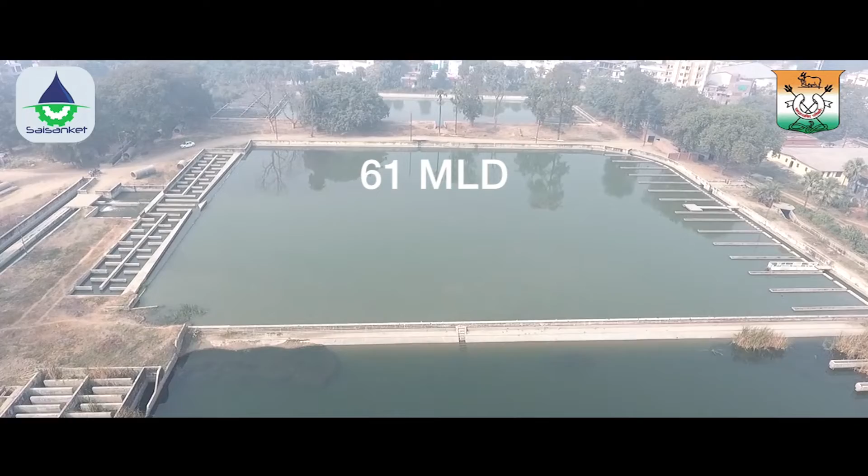The total current population for the Cis-Varuna region is 13 lakhs. With 150 LPCD demand and appropriate allowances for losses, the total demand for water is around 225 MLD for Cis-Varuna region. The total installed capacity at the existing water treatment plant is 311 MLD, comprising 3 different plants of 61 MLD, 100 MLD, and 150 MLD. However, the 61 MLD WTP is completely dysfunctional and the other 2 rarely work at full capacity.

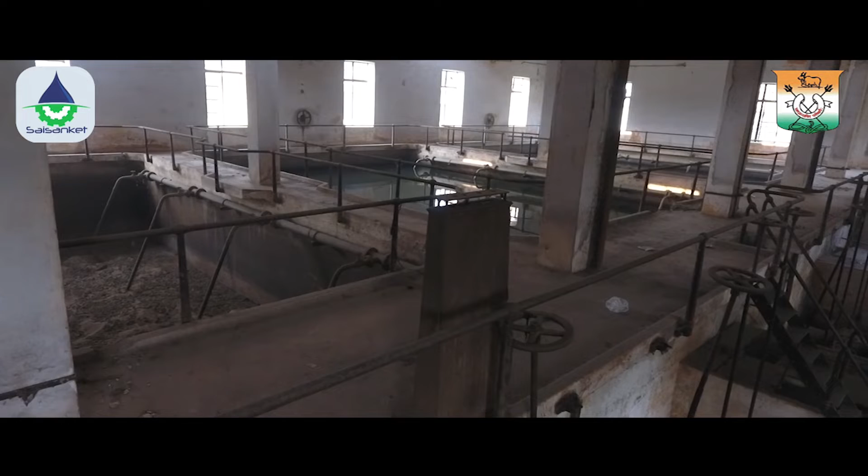Inadequate treated water coupled with loss of water in distribution results in intermittent water supply and associated problems, including poor water quality. Although the Cis-Varuna region water supply system is riddled with many problems common to most water supply systems in India, many components of the water supply system are in good condition and the rest can be rehabilitated to full design capacity at minimal cost. Restoring the water treatment plant and the associated raw water supply system to full design capacity can help boost the consumer supplies to desired levels, simultaneously minimizing serious bad water quality problems.

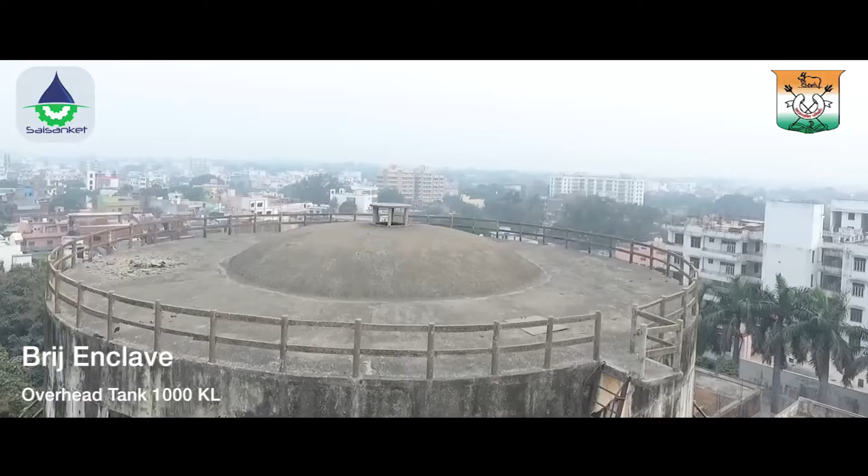Concurrent rehabilitation of clear water pumps and electrical panels, centralized monitoring and control of all pump houses, restoration of bulk treated water feeder mains, and installation of a hydraulic system that automatically regulates flow rates to various ground level and elevated service reservoirs will ensure equitable distribution of potable water to various zones.

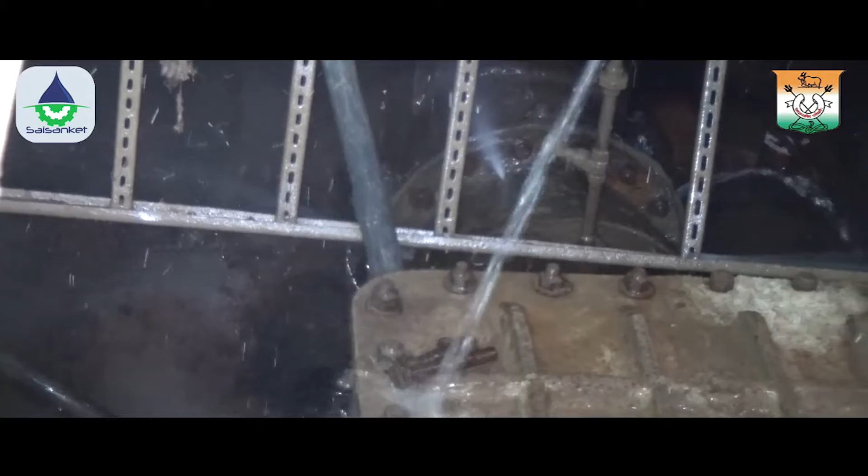The main reasons for the loss of carrying capacity are frequent leakages or burst conditions along the pipeline, breakdown of pumping machinery, and air entrainment from the periodic filling and draining of pipeline. Frequent leakage and burst conditions in turn are due to lack of proper surge protection system, inefficient check valves, also known as non-return valves, and absence of non-slam air valves.

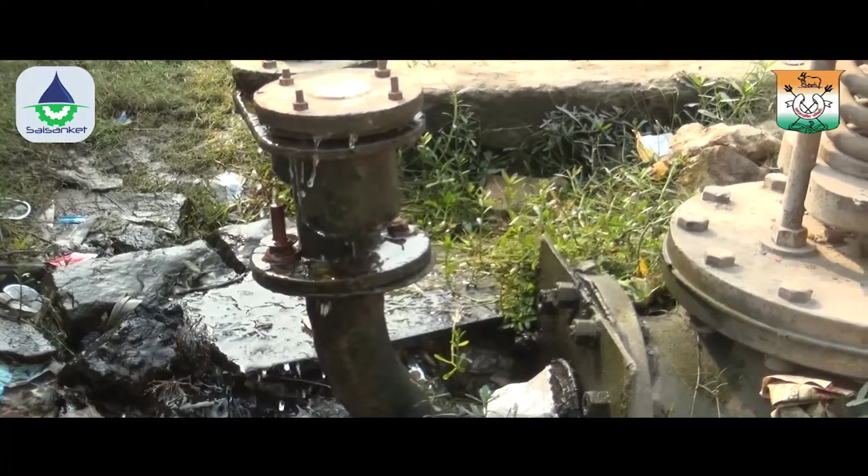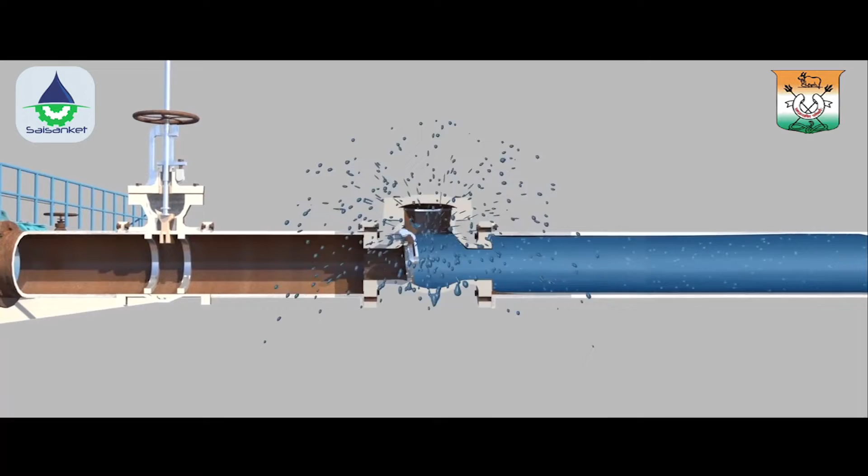Inadequate surge protection system. Every time the pumps trip, the water column slams on the check valves, both at the pump station and along the pipeline. When slam pressures exceed the pipe pressure rating, a leakage may develop or result in burst condition. In addition, repeated occurrence of slam pressures can progressively weaken the pipeline and lead to subsequent burst condition.

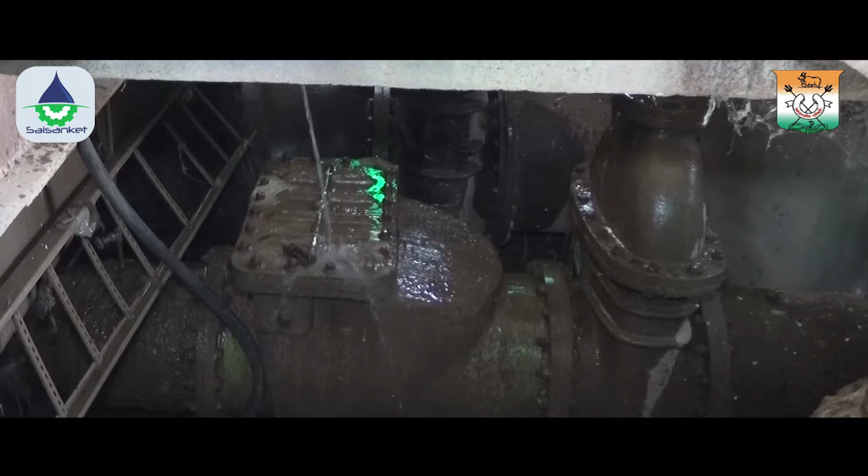Damaged check valves. Conventional check valves get damaged over a period of time due to repeated occurrence of surge pressures. Once check valves stop functioning, there will be heavy backflow through the pumps, resulting in vibration of pumps, loosening of seals and eventual leakage of water within the pump station. The damage can be huge if the operators do not react within 1 or 2 minutes and close the valves.

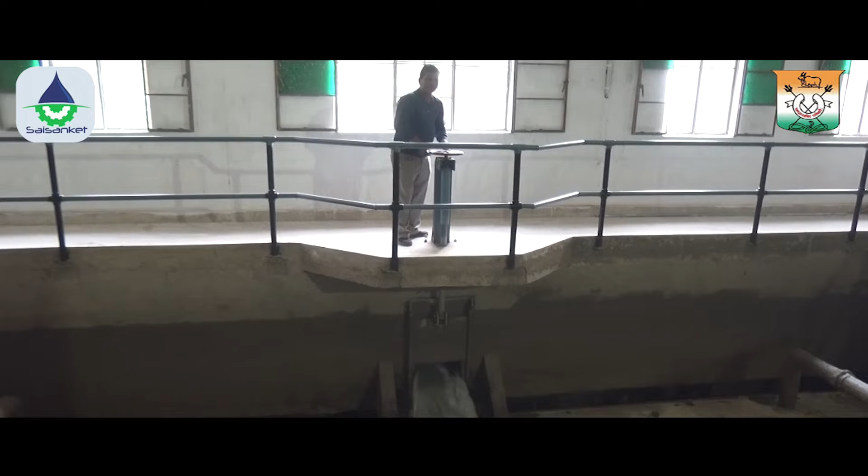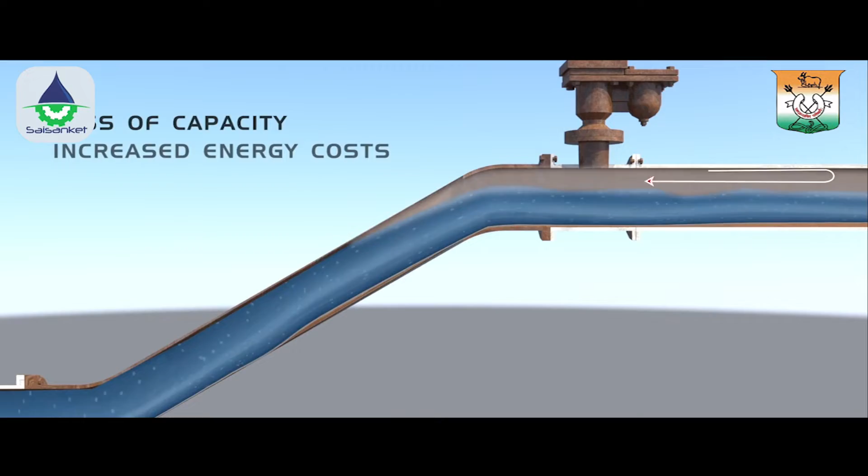Periodic filling and draining of pipelines. Failed check valves and periodic pump trip events result in frequent draining of the pipeline. Ordinary air valves cannot release the air efficiently and air gets entrapped in the pipeline during subsequent pump startup operation, leading to severe loss of capacity. Ordinary air valves will also result in air slam conditions, and resulting high surge pressures can generate leakages or burst events along the pipeline.

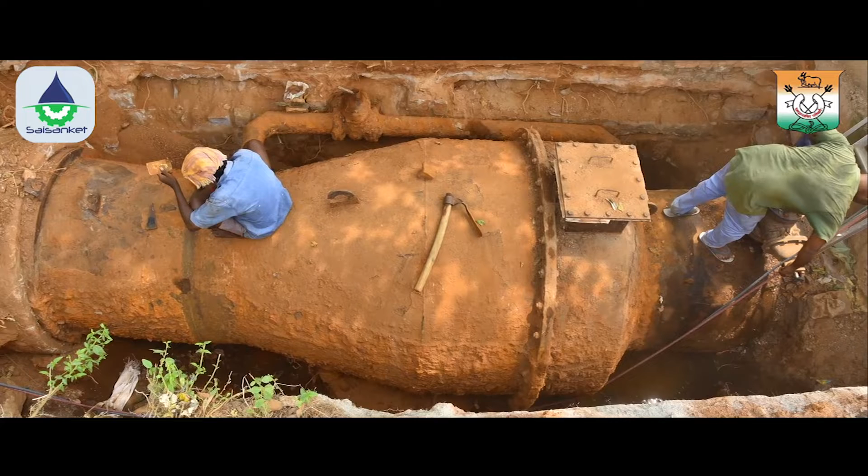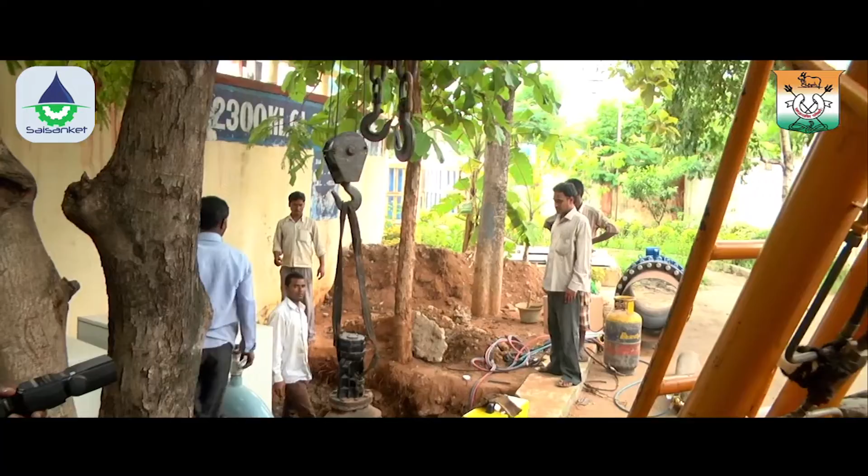Frequent pipe burst conditions. Every time a pipeline bursts or a major leakage is developed, it takes anywhere from 6 hours to 1 day to fix the problem and restart the pumps, causing a disruption in treatment and supply of water too. Pipe repair works call for emptying of almost the entire pipeline, and the draining process takes a long time and is often accompanied by loss of precious water and damages to the nearby crops.

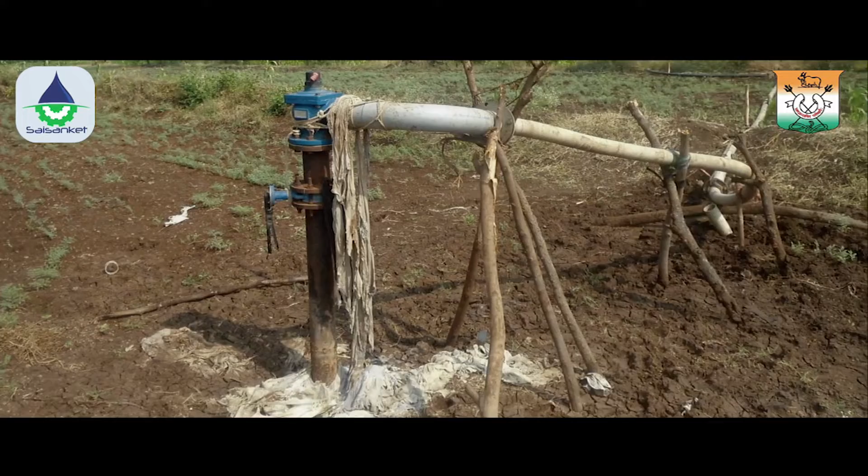Exposed air valves. The conventional air valves are exposed to people who tamper with them and steal water. The air valves may also become non-functional, which will have a negative impact on the hydraulics of the entire scheme.

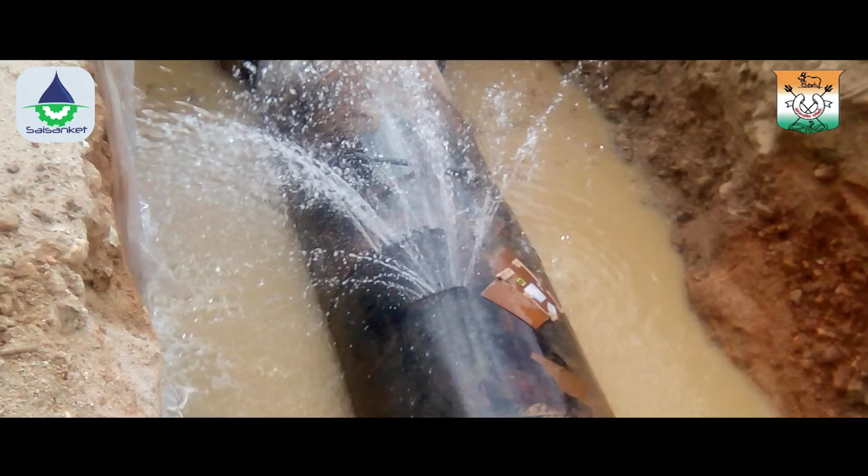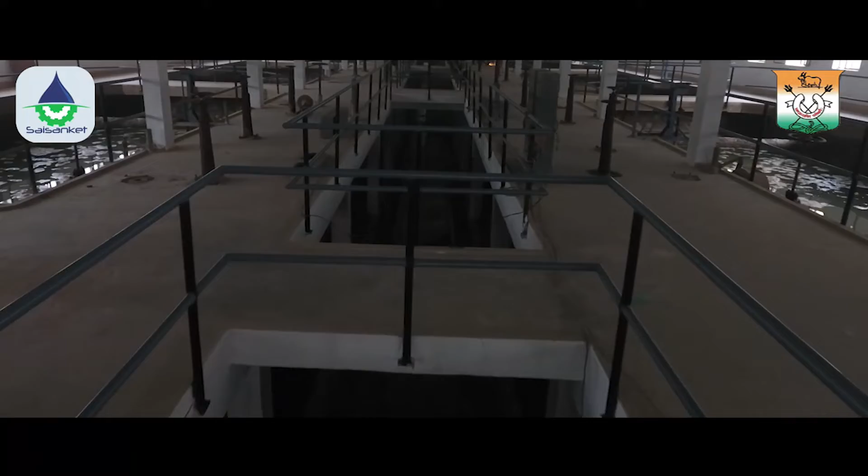These problems are not unique to Varanasi water supply scheme and are faced by almost all water supply systems in India. In addition to rapid deterioration of water supply infrastructure, loss of capacity increases the pump energy costs. For example, a 20% loss of pump and motor efficiency increases the energy costs by more than 2 crores each year for Varanasi Municipal Corporation.

The water treatment plant at Aditya is in very good condition and can treat water at full design capacity once the raw water side of the system is rehabilitated. Treated water is then distributed to various ground-level and elevated service reservoirs within the corporation limits and from there to individual consumers.

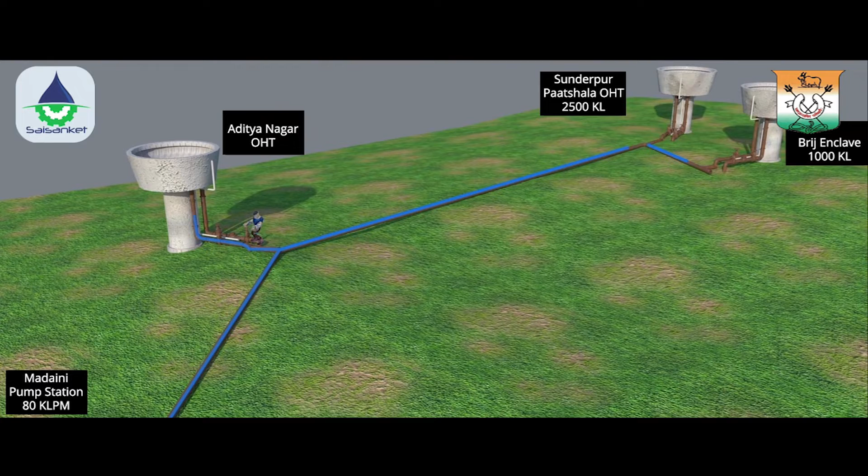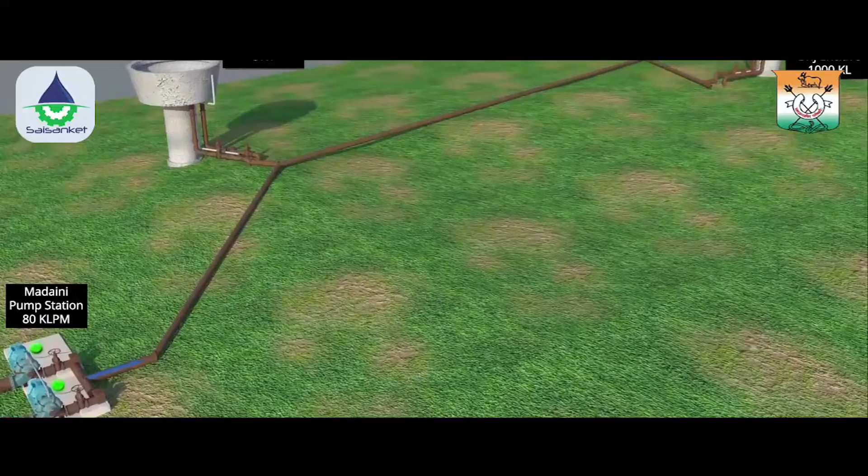There are problems associated with distribution of treated water as well. In the stage of bulk distribution of treated water, achieving equitable distribution of bulk treated water to ground and elevated service reservoirs is almost impossible, and the traditional method of manual throttling is a very tedious process. No matter how well a system is designed, the inevitable variation in residual heads will distort flow of water into each reservoir, which results in inequity.

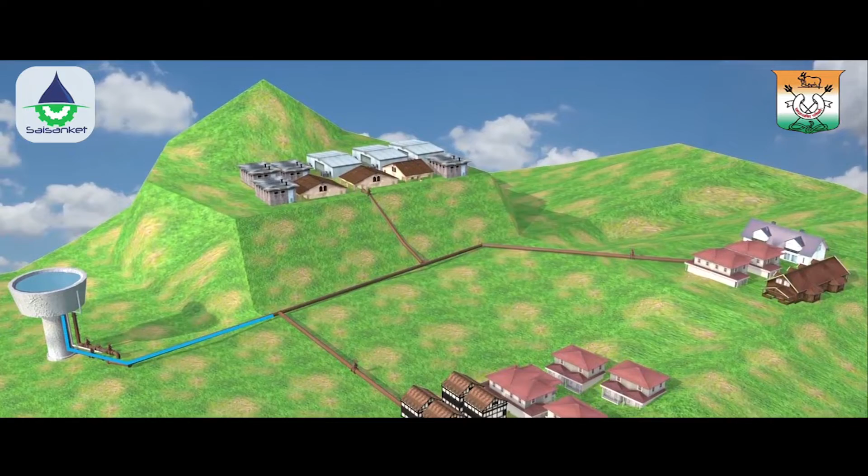In the stage of supplying water to households, once again, inequity will set in, as flow of water to various households is dictated by gravity and hydraulics. The supply process is done manually, which is also a reason for unequal distribution.

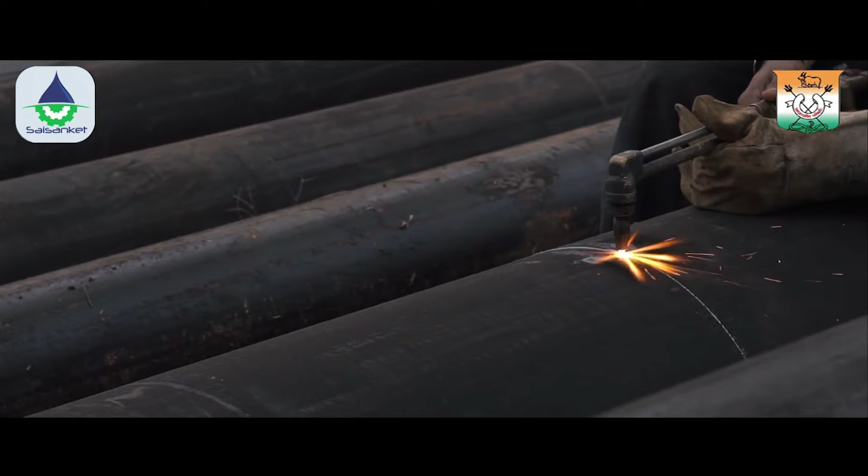Manual operation. The entire scheme is operated and managed manually by untrained manpower and hence mismanaged, leading to many failures of pumps and pipeline. Every failure leads to considerable downtime for repairs and maintenance, resulting in disruption of daily water supply and recurring unexpected and unwanted expenses.

Though the pumping machinery, surge protection system and some segments of pipelines are in badly deteriorated condition, the overall water supply infrastructure is still very valuable and should not be abandoned. Instead, a good rehabilitation program can unlock the value of existing infrastructure and strengthen the water supply scheme to original design capacity at a fraction of the cost of building a new water supply scheme.

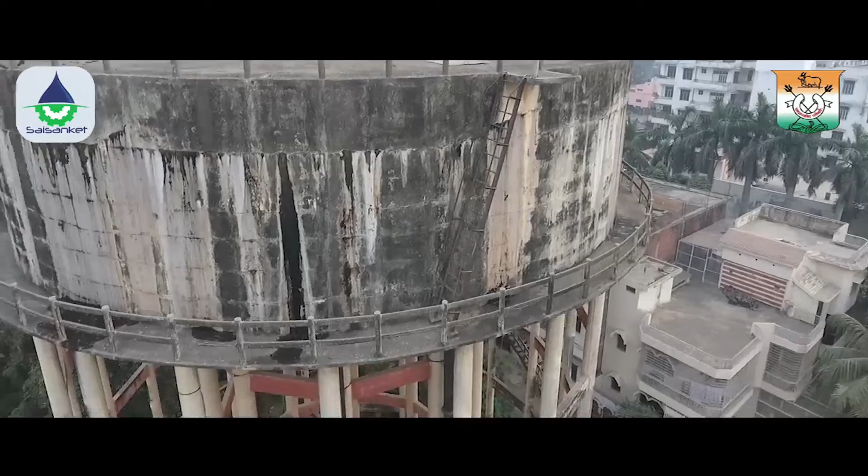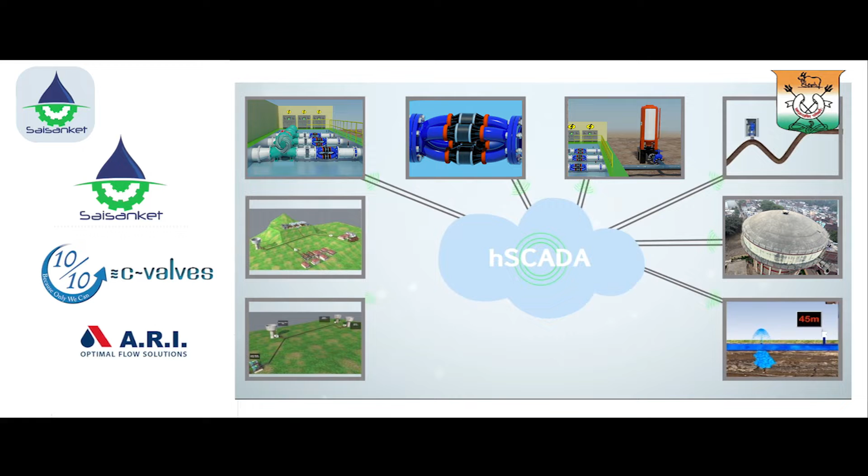Varanasi Municipal Corporation and the Public Health Department have taken up the task of complete rehabilitation of the existing water supply scheme with an aim to restore full carrying capacity of the raw water system and enable assured and equitable distribution of treated water. The rehabilitation work was also based on the most advanced and time-tested technology from around the world in order to prevent rapid deterioration of various components in the future and minimize operational energy costs. Solutions to the main problems pertaining to the existing system are:

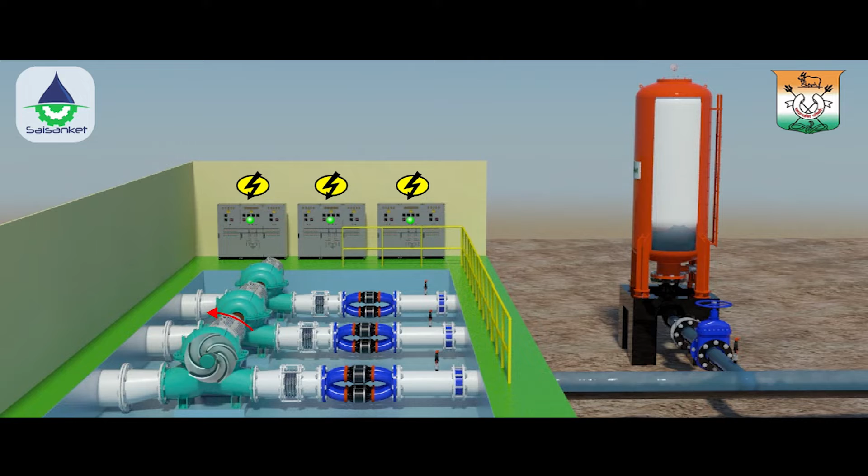Bladder vessels-based surge protection. These maintenance-free devices provide excellent compressed air-based surge protection for pipeline systems. They protect pipelines from both extreme low pressure and extreme high pressure conditions, thereby preventing future leakages and burst conditions as well as enhancing the life of pipelines.

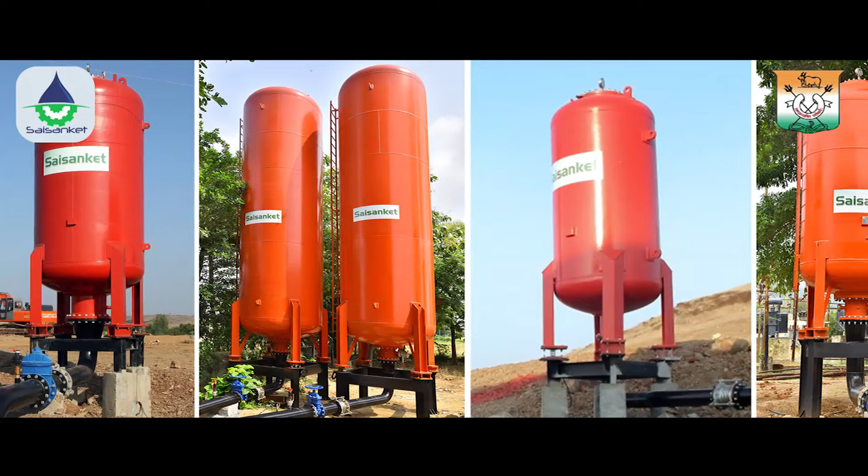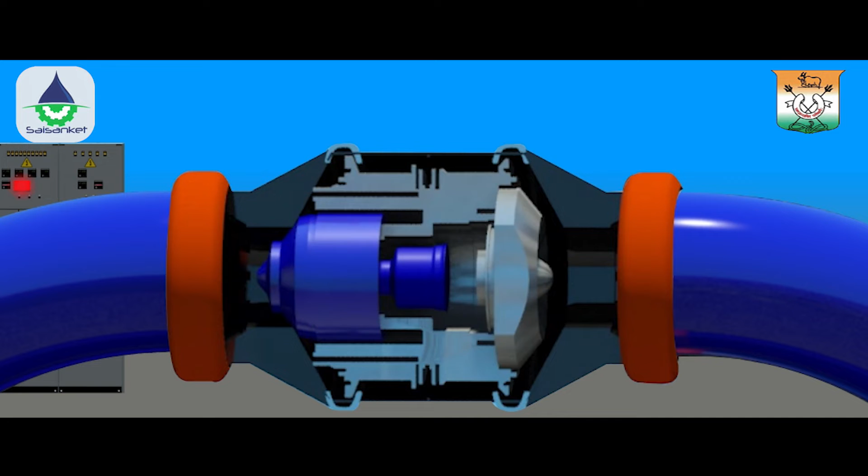Pump control valves in place of check valves. State-of-the-art Israeli pump control valves will replace the check valves to help with smooth starting of pumps and automatic stopping of flow reversal when there is power failure. The sturdy construction of pump control valves makes them fail-safe even under extreme operating conditions and prevents the need for the operators to run and close the isolation valves. Since there is no slam condition, all equipment within the pump station is very well protected and pumps will continue to operate at high efficiencies for a long time.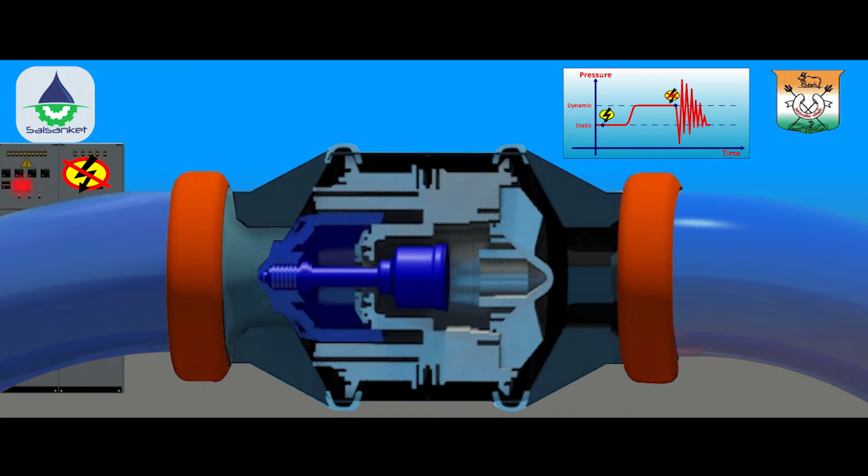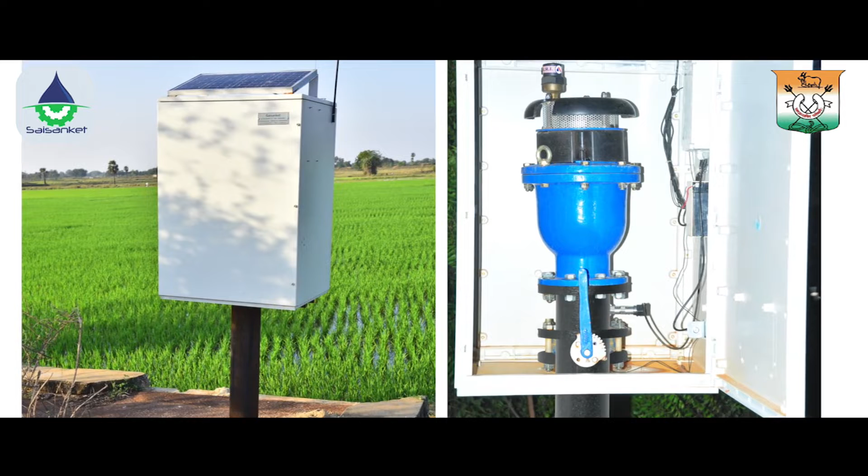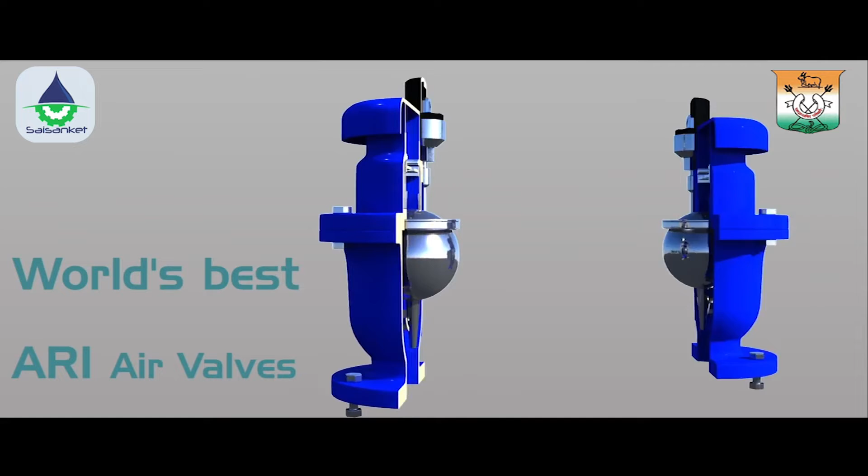Enhancing carrying capacity of the pipeline. Preventing entrapment of air along the pipeline is the key to maintain high carrying capacity of pipeline. The rehabilitation work employs the world's best Israeli air valves from ARI that will provide a fail-safe mechanism of removing residual air. In addition, the rehabilitation work involves continuous monitoring of the health of air valves, so preventive maintenance work can be undertaken in case of necessity and keep the pipeline in healthy condition all the time.

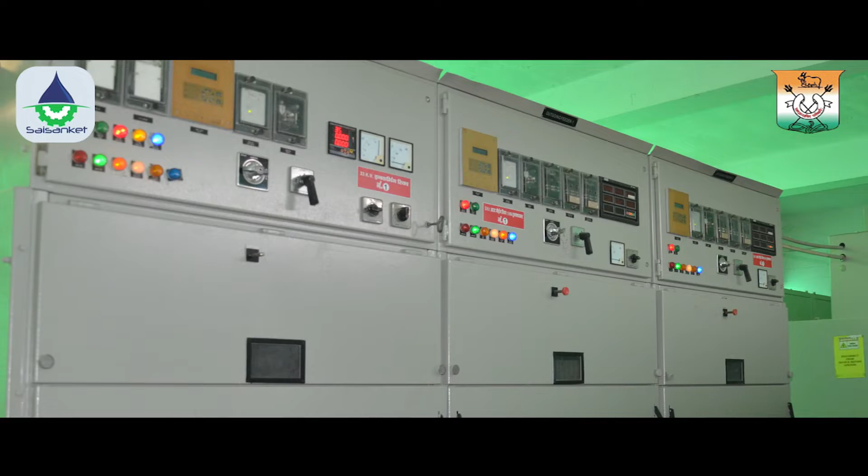Prevention of pipe burst conditions. Pressures will be monitored at each pump station using high-speed data loggers, and that data will be analyzed periodically to determine the potential surge problems. This will address the problems right away before they get worse, thereby preventing future pipe burst conditions.

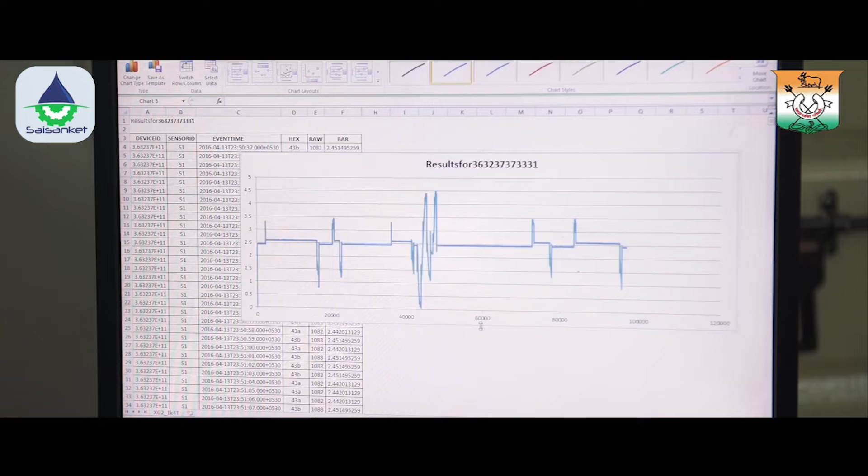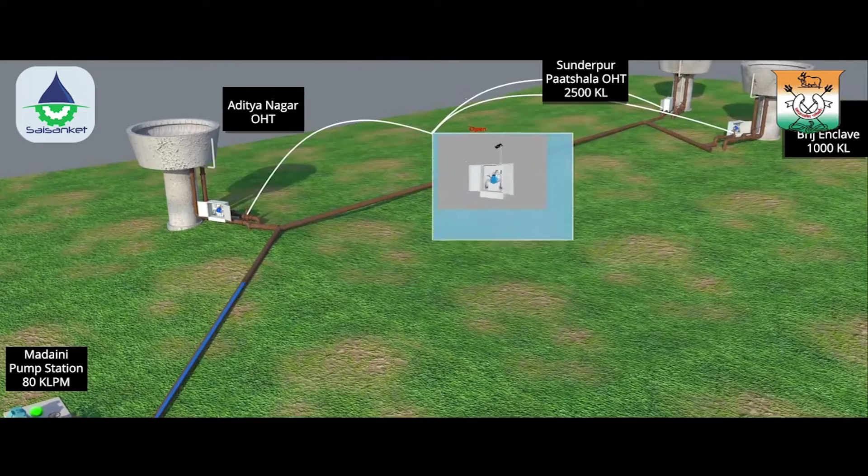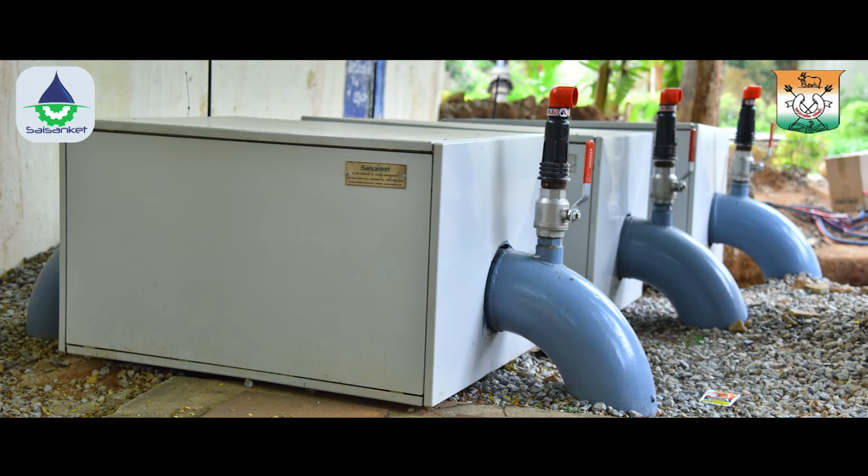Overcoming the inequity in distribution of treated water. Installing Reservoir Management System (RMS) at the inlet side of each receiving reservoir, which automatically shuts off the flow into reservoirs once a designated quantity of water is delivered to that reservoir. And for supplying to households, usage of zonal control valves based on an energy-less hydraulic solution called WDMs, which are set to deliver a certain flow rate, volume and for a designated time period. This will facilitate 24/7 supply over a period of time.

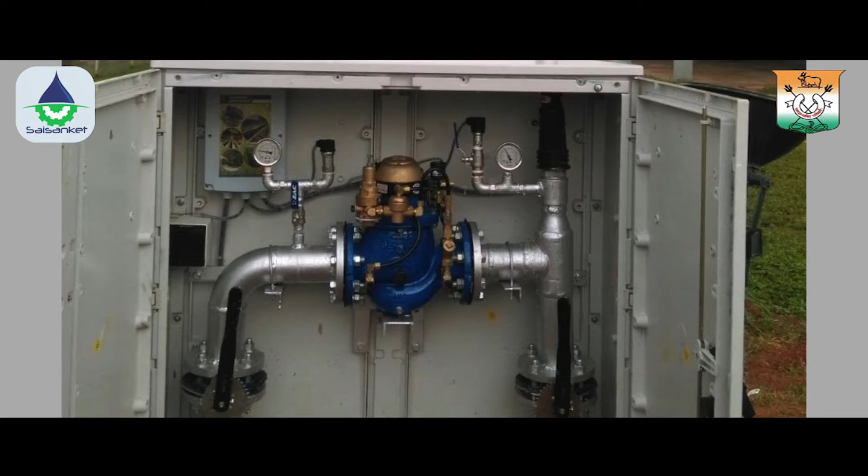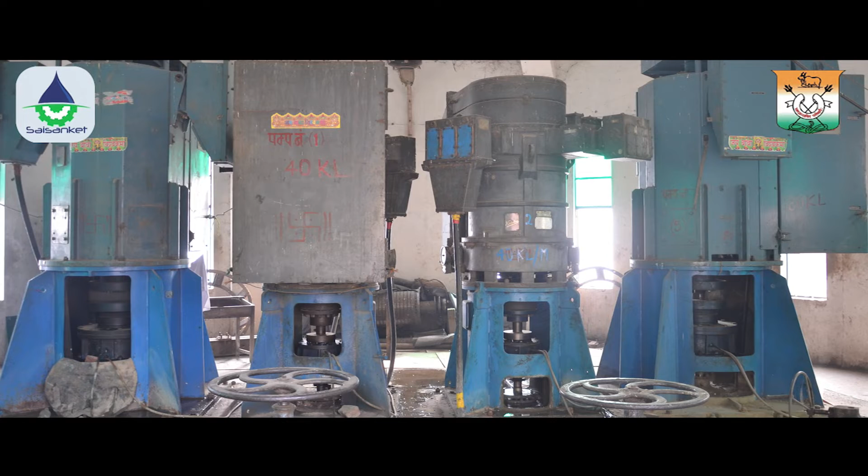Reduction in operating energy costs. Replacement of pumps to bring back full efficiency and replacement of electrical panels for synchronization of pump station operation, which results in reduction of operating costs of energy and maintenance.

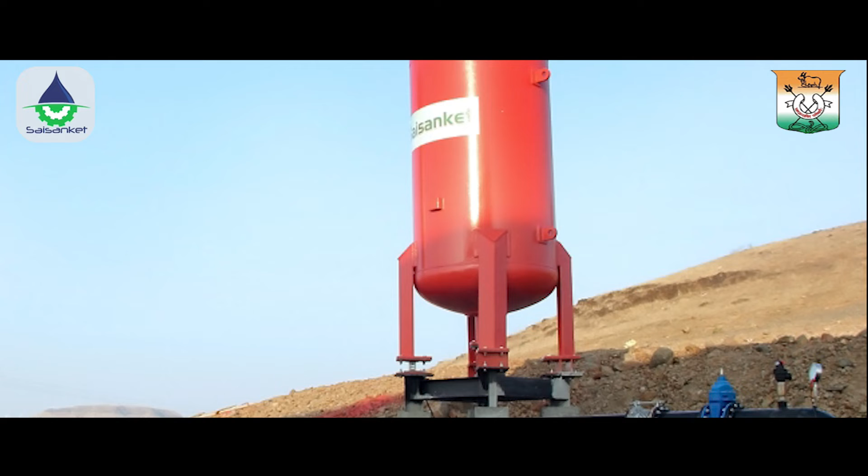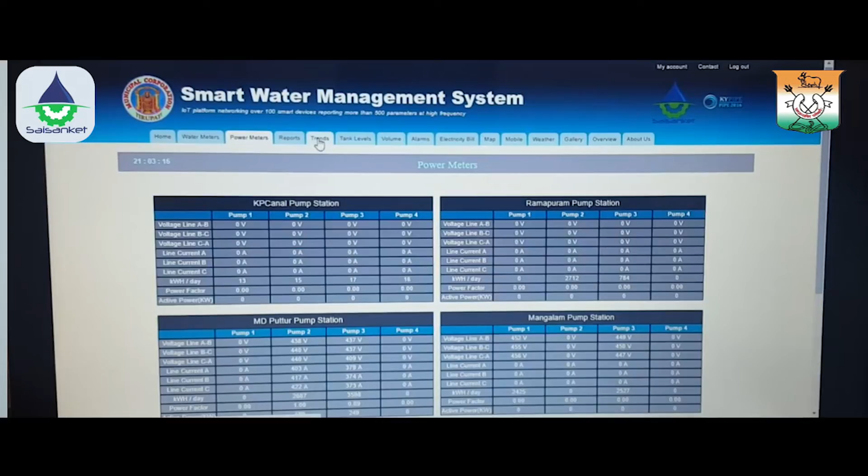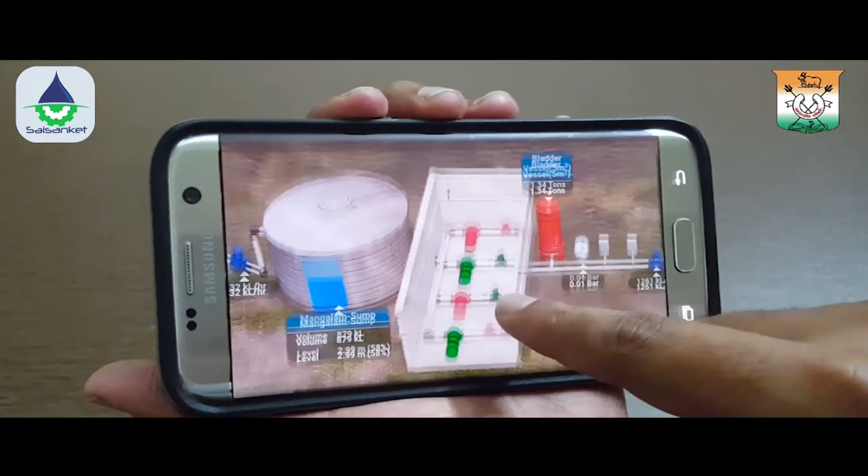Overall project management through continuous monitoring and control. For efficient operation and maintenance, all critical components of the system such as bladder vessels, air management system, and reservoir management system are connected to a smart network. The officials will be able to see the system working on their computers and smartphones and will be receiving alerts, intimations, and on-demand access to historical data. This allows for informed decisions in cases of vandalism, pipe leakage and unintended deficiencies in the system in real time.

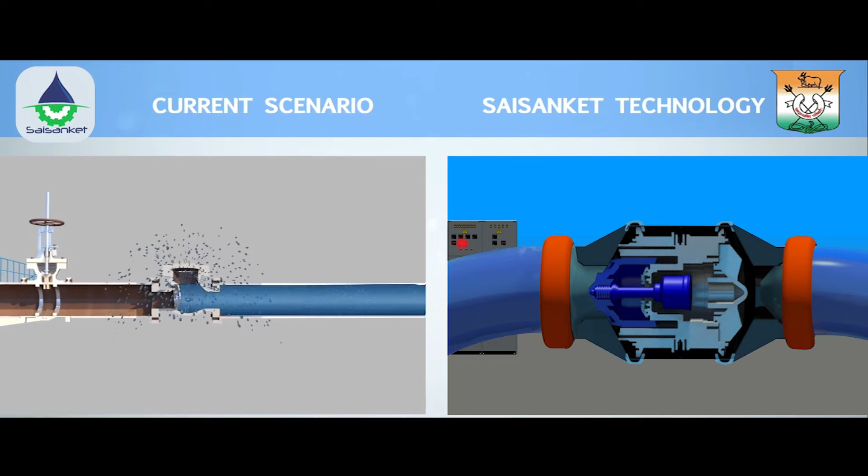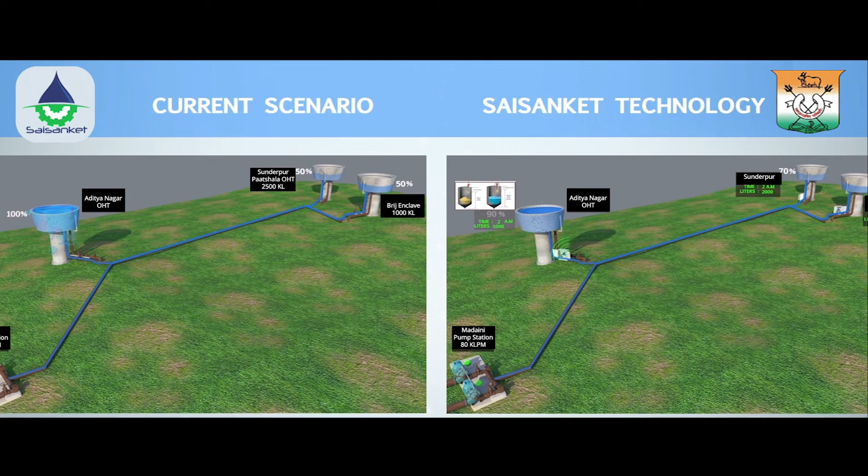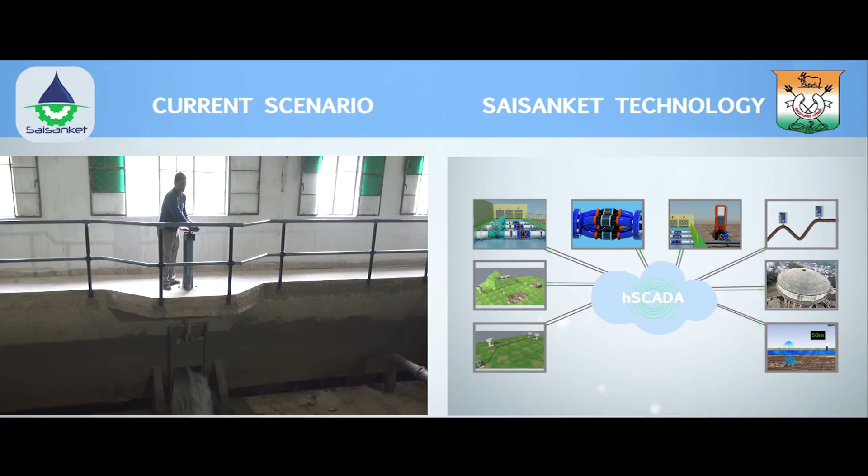With these best water management practices, state-of-the-art technology solutions and smart network tools by Saisanket, the Varanasi water supply system can be restored to original design capacity at a fraction of new water supply system cost. These changes will also ensure long-term trouble-free operation. The post-rehabilitation scenario will be a reliable water supply scheme that is fully automated with improved efficiency and assured water supply to the people of Varanasi on a daily basis.